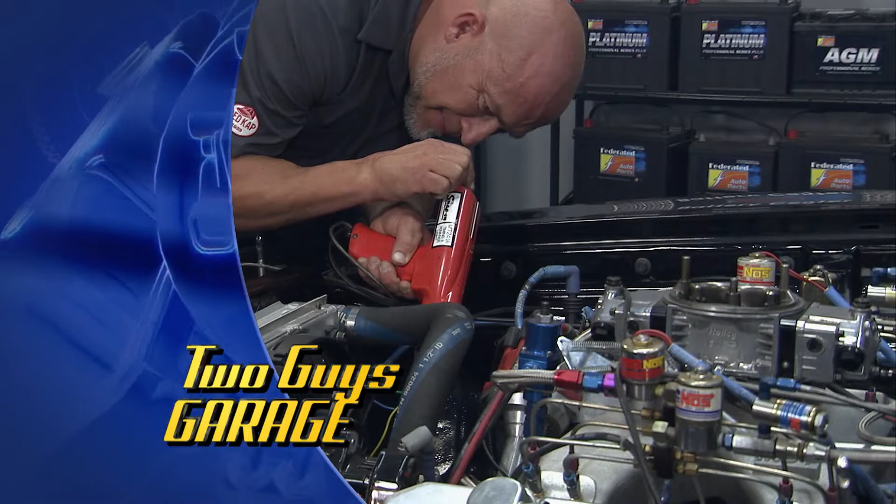So he thinks he's gonna dial this 2007 up to run with my 70 that's in the back. We'll show you in a second. This thing's gonna take off like a herd of turtles beside my car. I know that, and they know that. He doesn't realize that I know that.

Here's how you can benefit. Get this thing where it'll turn. I'm on torsion bars, old school setup, doesn't turn very well. There's your chance. That's my only chance. So we're gonna go left, right, left, right, left, like this. You get this thing working, turning, and I'm gonna go back and dial mine in. I'll see you in a minute, son. All right, I'll be on it. Really?

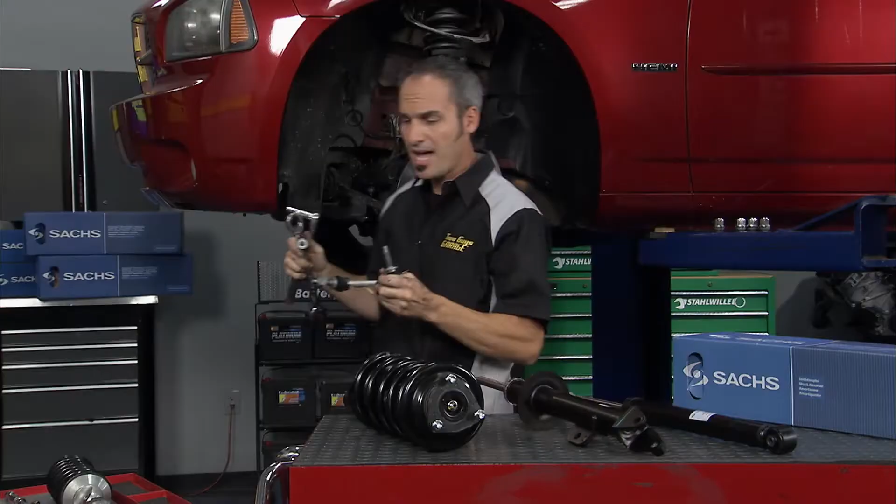If I even have a shot at staying in the same county with Willie once he gets rolling, I've got to dial this thing up. So we're putting shocks and struts on all four corners. Now, you typically want to do at least in pairs. I'm going all the way.

We're starting with precision German engineered shocks and struts from Sachs. These are OE quality pieces, but what we're doing here while we're working is opening up this giant philosophical question: is this a shock, a strut, or a coilover?

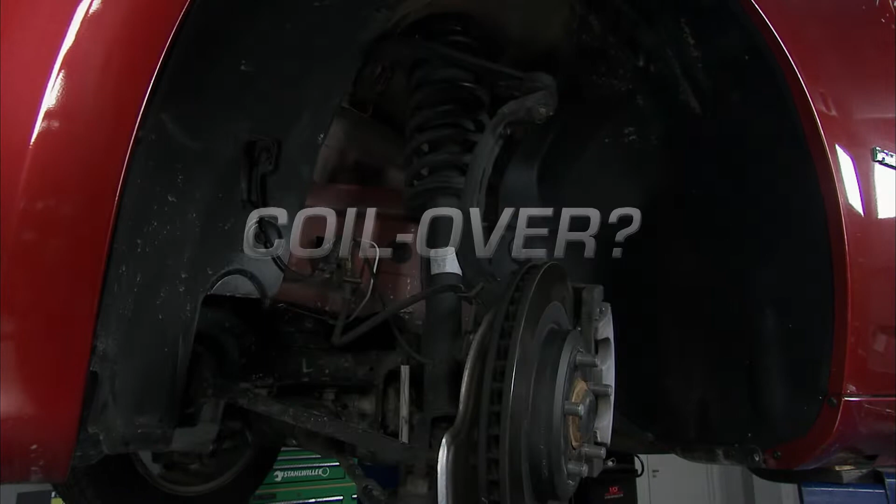Let me explain. If we go back to shocks, it's a real simple device. It just controls velocity or damping, right? It's two forces this way.

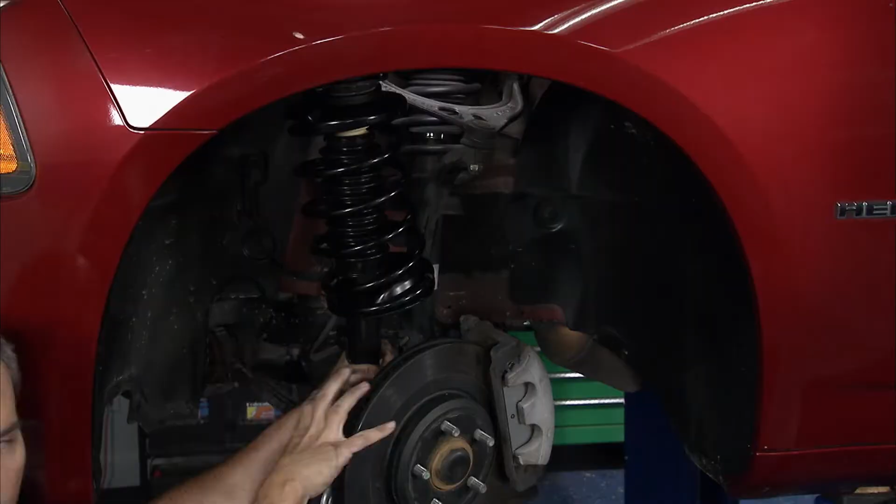Now when you get to a strut, it's actually incorporating part of the suspension. So in the older days of struts, you've got a lower control arm, but you've got your upper knuckle here and hub actually bolting to it. So your ball joint now becomes part of this thing. It's taking different loads, and you don't have an upper control arm on the top. This actually mounts up to your fender area and is taking all the loads that the upper does.

Now it's nice for the OEs because they could save a lot of components, and it works pretty darn good. But if we notice here, this strut now has an upper control arm, ball joint, a full separated knuckle, and a control arm down here. This is just really a shock, but now it has a spring on it, so it looks a little more like a coilover. The only thing it doesn't have is adjustability for ride height, but everything else, it pretty much does.

For all you guys at home, make sure you get a good quality brand. Sachs has pretty much 95% vehicle coverage up through model year 2012 with all kinds of parts, pieces, kits and boots. So let me get rolling. In the meantime...

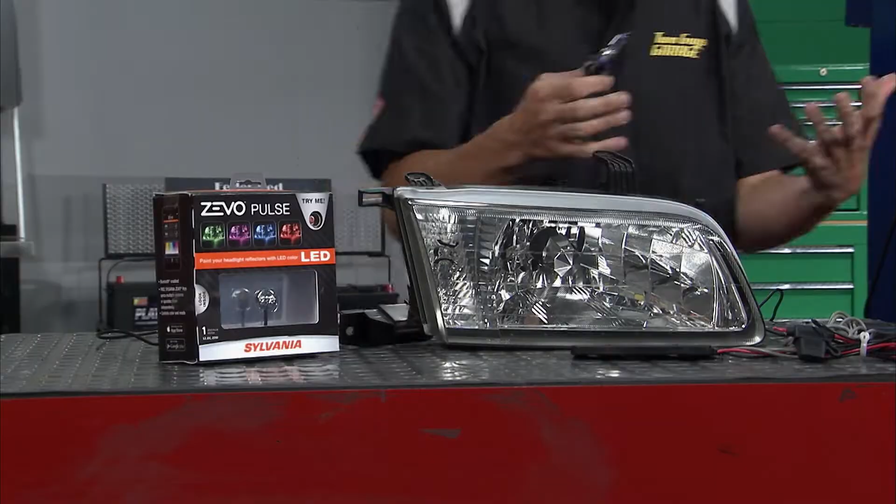Welcome back. Now, while Willie's getting this 70 Charger all juiced up, ready to just smoke me, at least when we get somewhere, and I've been seeing taillights the whole time, I can show up and look cool. I'm gonna show you how we're gonna do that. I'm gonna take the old bulbs out of this baby right here, and I'm gonna replace them with Sylvania Zevo. What that is, it's their brightest, whitest halogen, but it's been modified to make it extra cool.

Check this out. On the back side here, you have a light pipe. So that's basically like, I think, fiber optics, where I can shine right through this with another light, which happens to be right here. This is an array of LEDs sitting right in here. Now, if I connect it to the back side of this, like this, right? Now all of a sudden, when I put it in my headlight assembly like so, I can project whatever I want through there, a whole color pattern of LEDs.

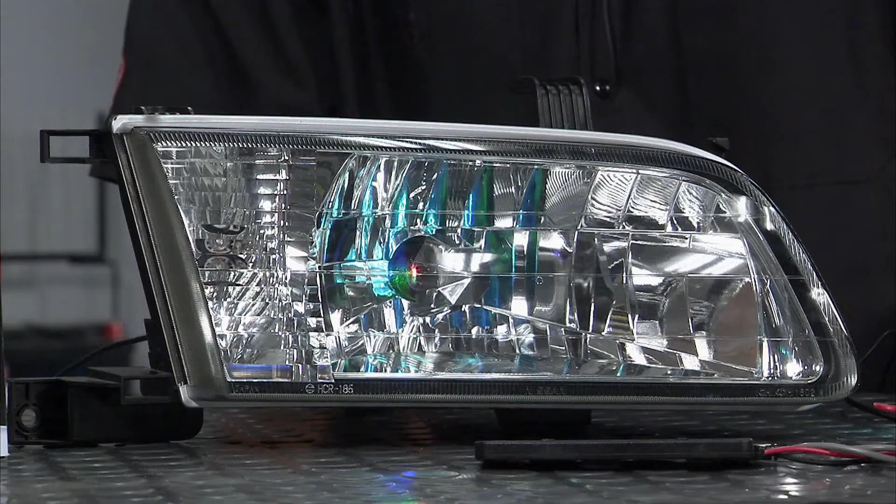I can make them flash, I can do all sorts of things. Let me set it in here and I'll show you. Now, bang, I can crank this thing up a little bit and I can go through all sorts of different colors, brightnesses.

Now, if I go into audio mode, that's even cooler, right? So I can put it on microphone, which is super simple. For my phone, I'm gonna Bluetooth right to this simple controller. So everything that I'm either saying, if I'm yelling out at the crowd, or I got my music playing from the speakers, it's gonna pick it up and match the beat. Or if I wanna go into my playlist and play a song right out of my phone, this thing will read it and jam right with it.

Now let's say you don't have one of their many, most popular sizes, you can use their Pulse system. The Pulse is the exact same thing, it's a little LED engine. You just gotta find a little spot on the front of your headlight. You can put these on fog lights, maybe under your motorcycle tanks so you get a little flashing going on your engine. Pretty cool stuff, man. And it's so easy to put in, 2 little connectors here to your battery, tuck that away, and you're all set. So I'm gonna get this installed because even though I won't be the fastest guy out there, I'll definitely be the coolest.

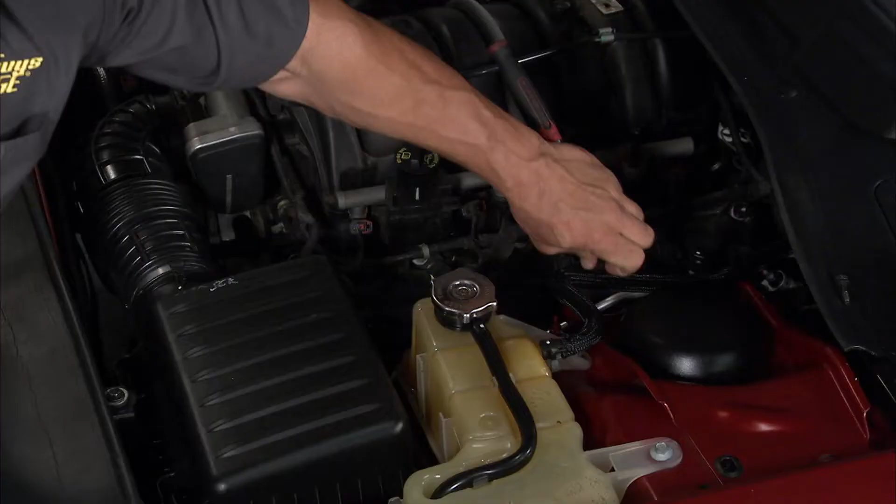All right, I gotta show you something cool. We have some AC Delco professional coil-on-plug boots here I'm gonna get to, but wait till you see when I get this coil out, I'm gonna show you something pretty cool.

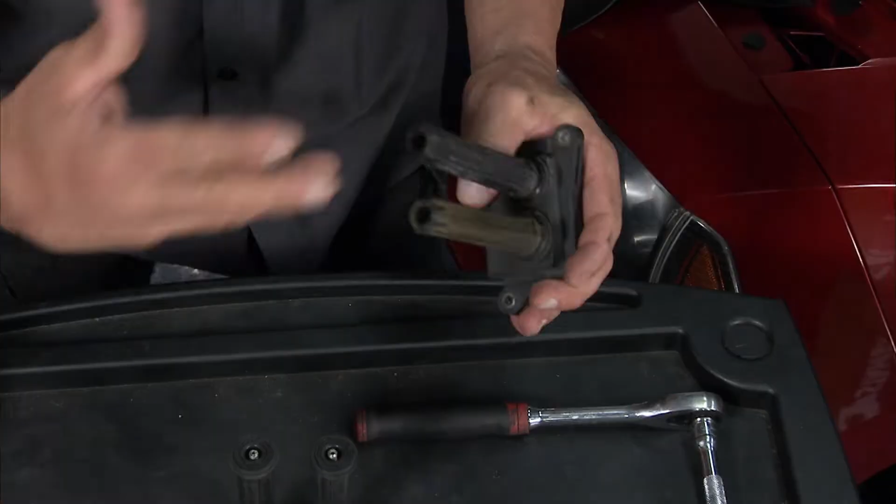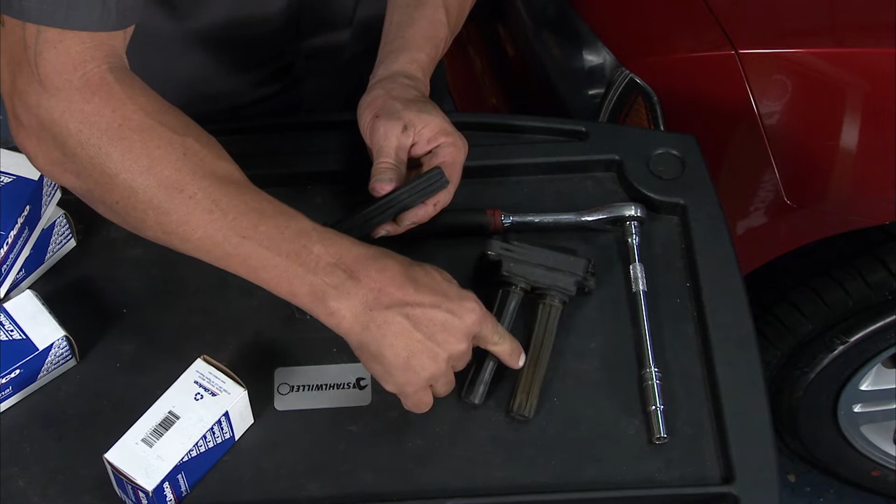Now what you're looking for on any of these is a real snug, tight fit. That way it's gonna keep contaminants, moisture, and so forth away from the plug. That's gonna promote a long plug life. You're looking at something like this high thermal temperature silicone, that's gonna protect against thermal overloading, which you already see on this old plug boot. Get to that in just a second. And check this out, stainless steel wiring, that's gonna ensure it carries all those volts down to the plug where you want that big charge. Now, this is pretty interesting on this Hemi.

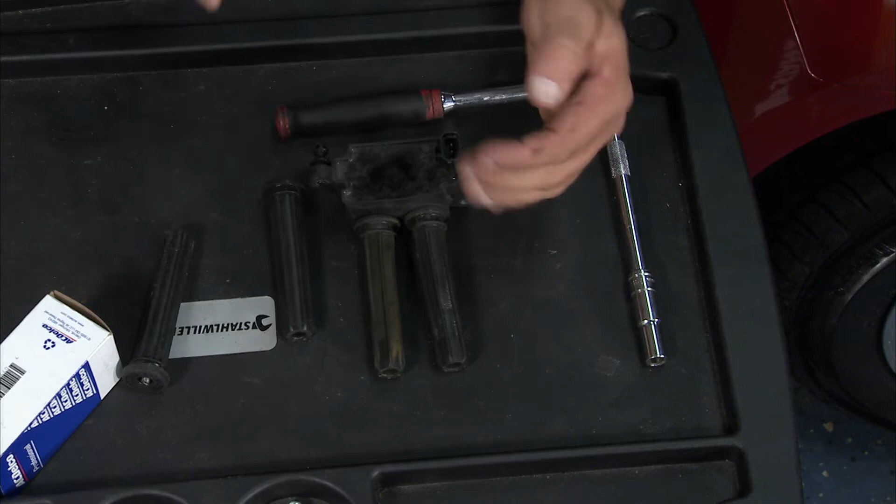Bet you didn't know this. So this guy, I'll show you with a pen, believe it or not, has 2 plugs per cylinder, right? Did you know that they're firing like this at the same time? So what happens, you got this U-shaped rod in here and it's wrapped up with a bunch of wire in this coil. A spark travels down this guy, lights off from that electrode to the ground strap. Then it grounds in the head, travels around, and comes back up through the ground strap to the electrode and back up this guy. So it's firing this way at the same time, like forwards instantaneously and backwards, forwards and backwards. Wrap your head around that, dude. It's like, what?

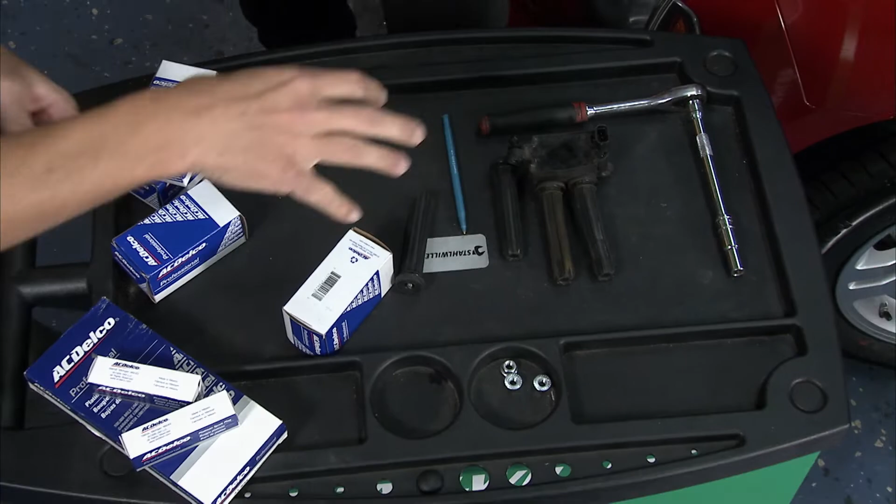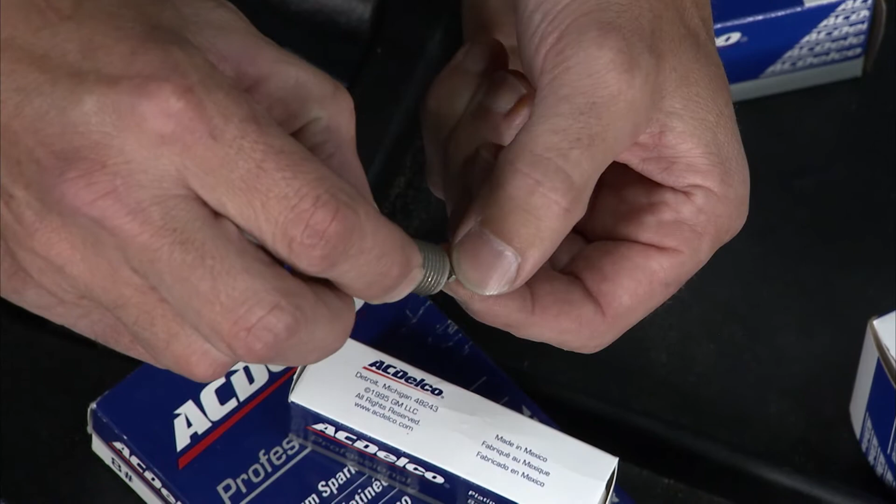Pretty cool. Well, we're gonna get specific with these plugs for this car, right? You want the right plug for your application. We're doing the AC Delco Double Platinum. Now that's gonna have platinum on 2 spots, the center electrode and up underneath that strap. And what that's gonna do is give you that 100,000 mile plus kind of wear, man, and these are gonna give you a 100,000 mile warranty.

Can't beat that. Yeah, if we're gonna wick this thing up in the future, get real performance and dose a lot of heat at it, we can go to their Rapid Fire brand. I'll explain a little bit of that over here.

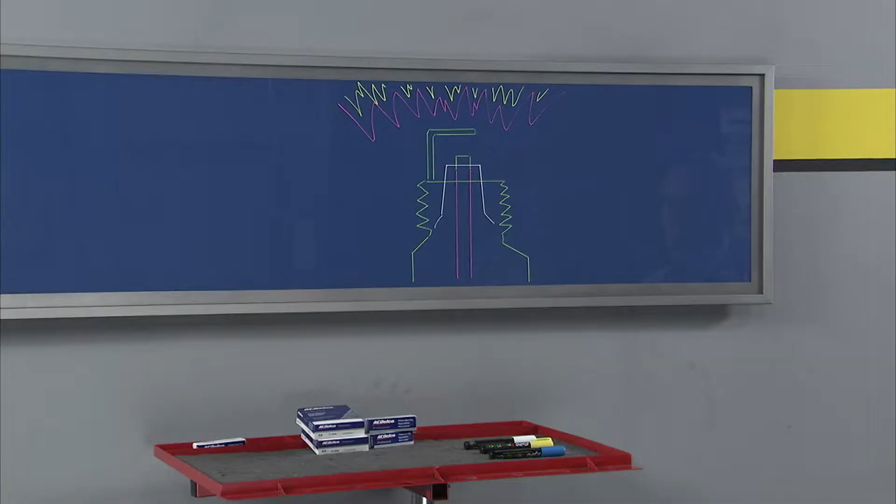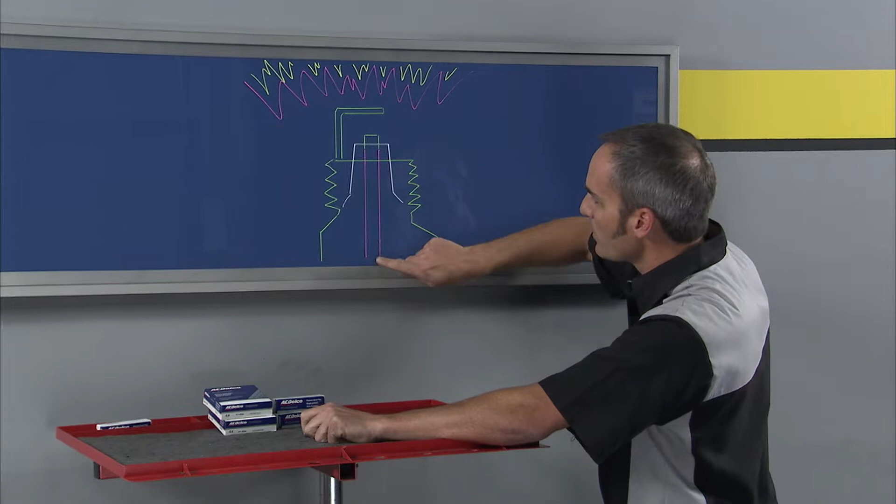Now, spark plugs seem like crazy simple, but there's actually a lot going on in there, and of course they get confusing with all these different fine wires and platinums and whatnots, so I thought I'd give you a little bit of background here. So we know we're going up through our center electrode and we're firing off to our ground strap and grounding out to the engine, right? And so you're firing typically off an edge there, so I might get a little fire off a sharp edge.

Well, that's great, except on a cold start, right? That's actually a cold piece of metal, it's a mass. And so I get a little spark and I start to get a little bit of flame kernel here, and there's enough huffing and puffing going on, I can blow that out. So what companies are doing over time is we've got these little fine points, a little fine wire, right?

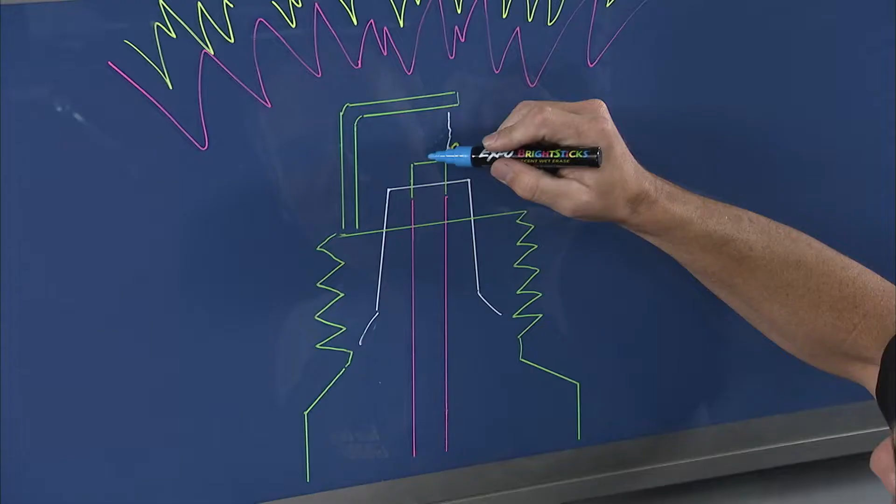You see a little tip on there, and what that does is it keeps a sharp edge, which is great, but now they have to coat it with something because it's so small, it'll erode away faster than this big guy, so then you start hearing things like platinum. Platinum lasts a lot longer than typical materials for the core, so it lasts for 100,000 miles plus.

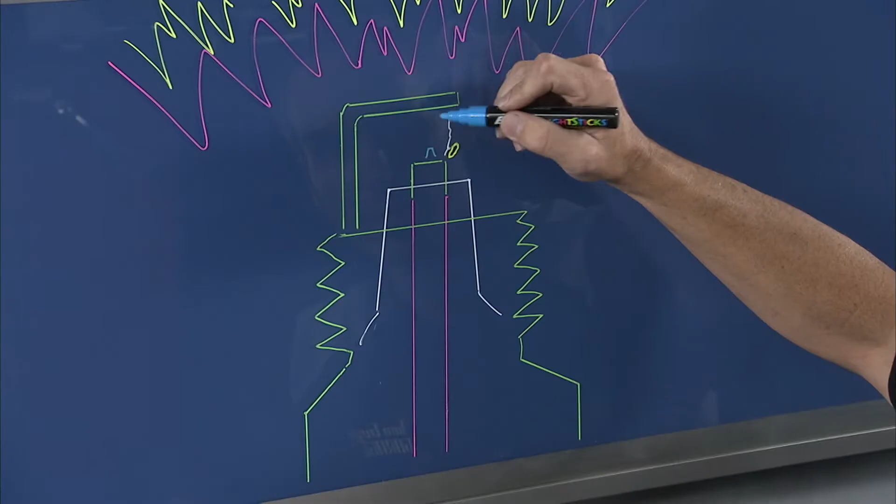Now you remember, we talked about those plugs are firing in both directions. So you notice a lot of these plugs are starting to have a little tip up there, so you can fire either way. You're super happy on cold starts, but you're managing the heat for all your performance driving.

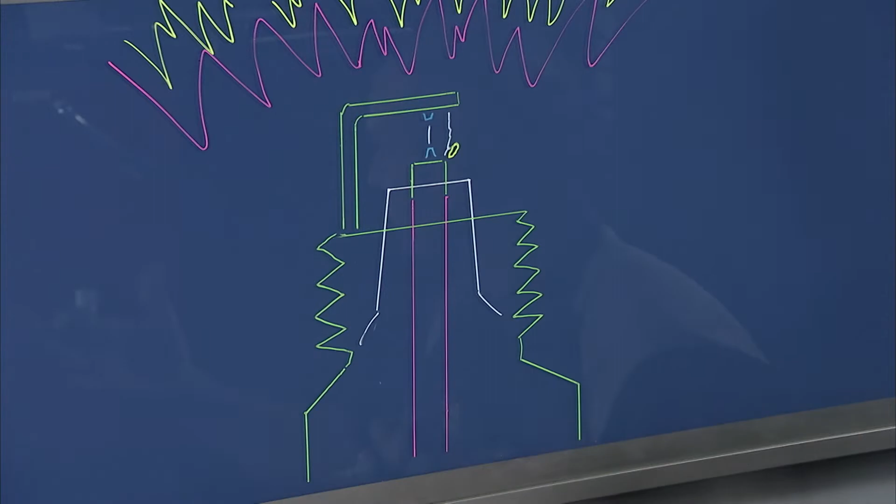Ooh, you are a master of the marker, my man. I did a lot of coloring as a kid. Yeah.

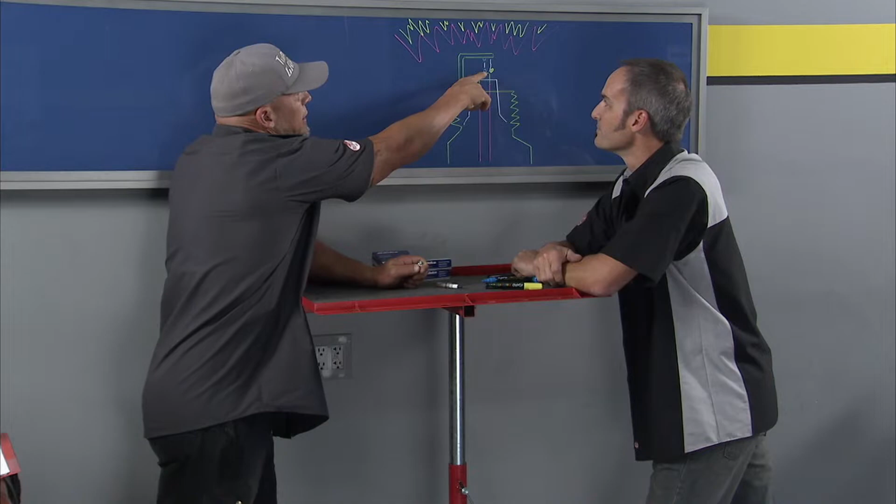One thing you'll notice for the race car applications is they don't have this little piece of metal hanging out there because it just gets too hot. On the rapid fire plugs, you'll see a big hunk of metal sitting down there and a big thick ground strap, not this little guy you have here for our performance-based applications.

Speaking of plugs, did you finish over there or do I gotta go help you out? No, I don't need to change plugs in my car to whoop that. All right, so apparently I'm gonna go finish it up.

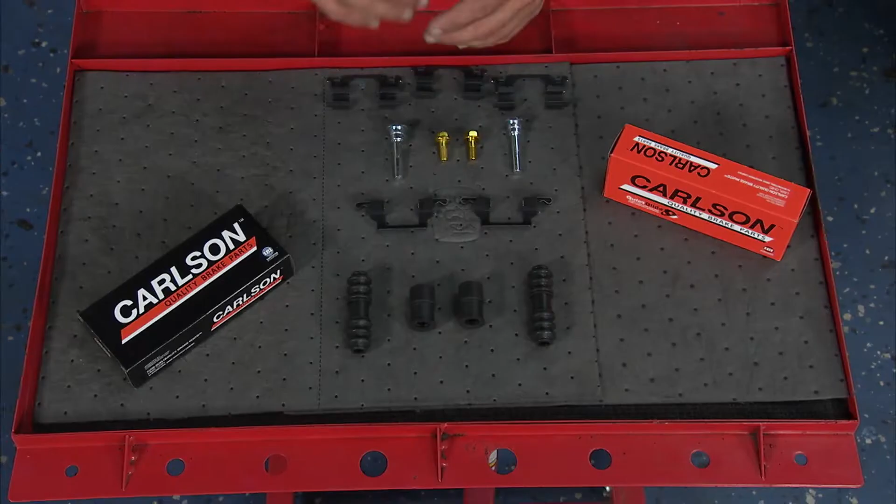Guys, you know it's not a complete brake job without doing your brake hardware. You don't invest time and money in putting new pads and shoes on your car without replacing the hardware too. When you're replacing brake hardware, make sure to use parts made with the highest quality materials possible. Otherwise, you can see early corrosion and extra wear on your pads and rotors.

Carlson Quality Brake Parts recently introduced these Quiet Glide brake pad abutment clips. These are the first aftermarket brake clips of their kind. They're made from a combination of stainless steel construction, PTFE coating, and vulcanized rubber. The stainless steel gives you better durability and resistance to things like corrosion. Carlson uses superior quality stainless steel to ensure a long life for their brake hardware.

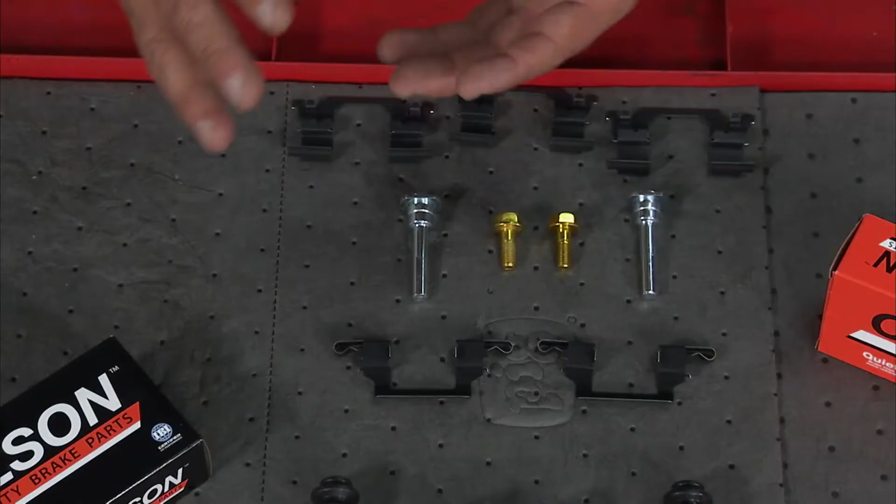They put these clips to a salt and spray test, and even after 230 hours, the clips didn't show any sign of corrosion. That's compared to inferior stainless steel materials where they started rusting 20 hours after that spray and salt test. The vulcanized rubber coating of these clips helps to drastically reduce brake noise.

When you put new brake pads and replace the brake hardware with one of these kits, you can reduce your brake noise up to 70 decibels. That's about as loud as a vacuum cleaner.

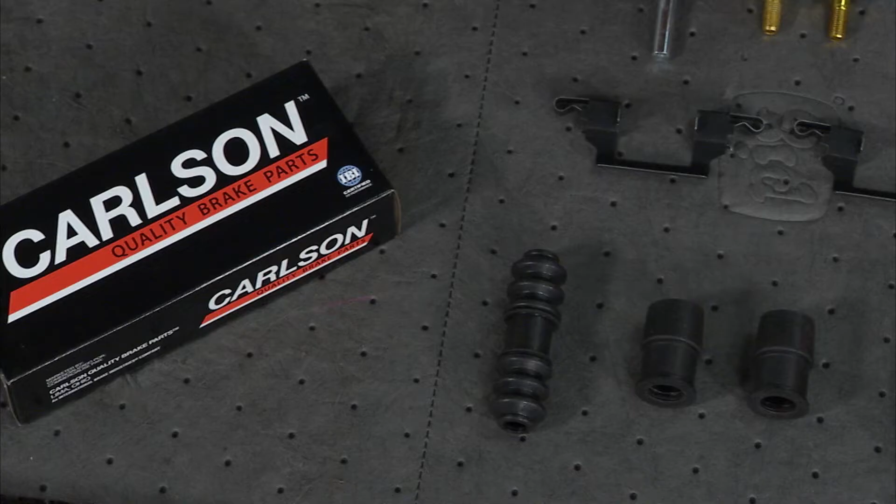The brake contact side of the clip is also coated with PTFE coating, which is an extremely low friction coating that actually self-lubricates, so pretty much nothing sticks to it. This coating reduces drag on your brake components and reduces wear on your pads and rotors. It also makes for a better pedal feel.

Because your braking system is producing less friction, this also reduces heat and you can even improve your fuel efficiency. PTFE also helps repel water, which protects clips against corrosion. Each brake hardware kit package includes an IBI certified seal to ensure the highest quality products for fit and performance time after time. Pick them up at Federated Auto Parts.

Dude, this thing is so cool, man. Yeah, this is the Titan. Now, believe it or not, I paid $300 for this car. It was in the field, it hadn't run in a decade and a half, and it looked nothing like it does right now. It does not look like a $300 car.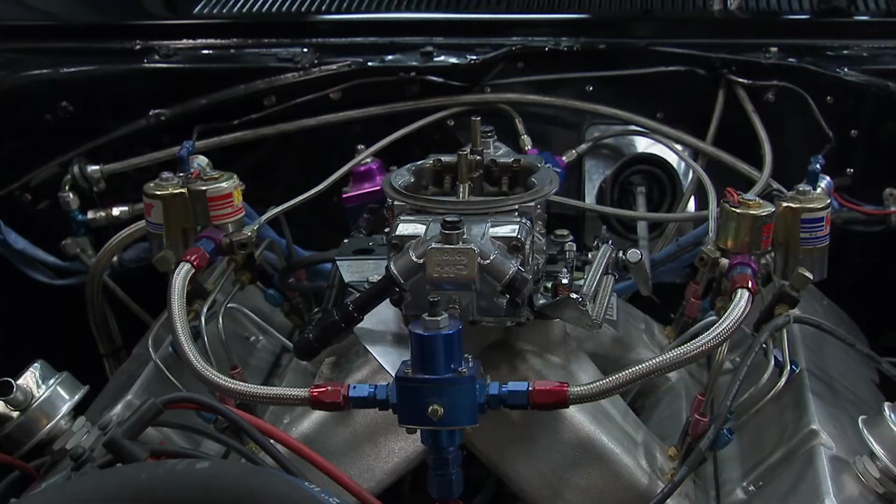Yeah man, so it's a 500 cubic inch big block. Right now it's in street form. When I go to the track, typically I change out the carb, add a little timing, and so forth, but we're gonna get to that in a second.

Then you got this going on, man. Tell me about the fog. Yeah man, I'm a big nitrous guy, so I'll tell you what, this car eats, lives, and breathes nitrous. It loves it. I've thrown as much as 500 to it. It runs mid to low nines at about 152.

Cool. Well, he's got it in street form. He got some timing backed out of it. He runs a lot of pump gas so we can go cruise around, but we're going to the drag strip, so we got to get some octane back in the tank so we can dial this thing back in and go racing. So come play with us on our dyno.

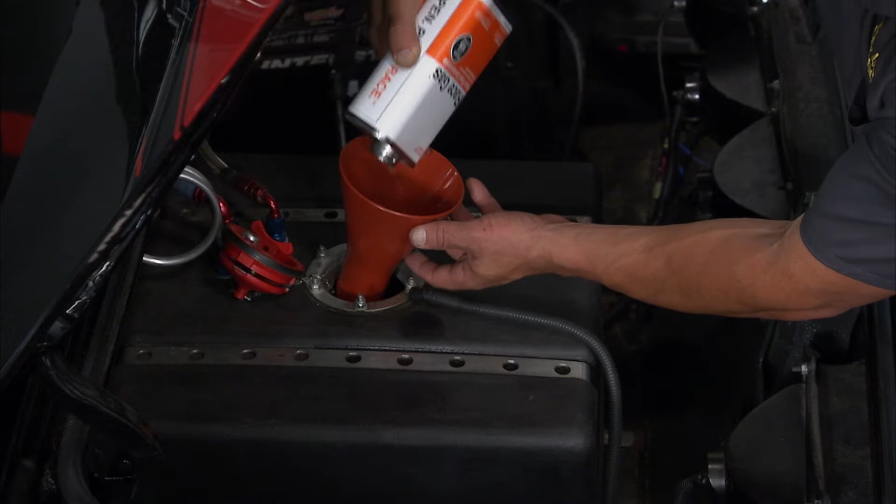Here we go, pouring in the race gas, race fuel concentrate. Woo-hoo, that's what I'm talking about, man. Now I'm ready to go racing. Believe it or not, that makes my fuel 107 octane. I basically made race fuel out of some premium unleaded.

I don't have to worry about traveling all over the place, finding a place to carry race fuel, how am I transporting the stuff, where am I putting it, paying I don't know, $100 for 5 gallons.

What I like about it is it's a direct replacement for standard distilled racing fuels, because this isn't your sort of octane booster. It's distilled racing fuel that brings the octane, but it also brings the BTU, the energy content for the volume you put in your engine. It's a completely unique and different chemistry. It doesn't change your air-fuel ratio, and you can have a couple cans in the trunk.

Now, you ready to cap that thing off so we can do a couple of pulls? We're going to get on this dyno and start doing some runs, put in some spark. We'll see you in a minute because we're going to take a break.

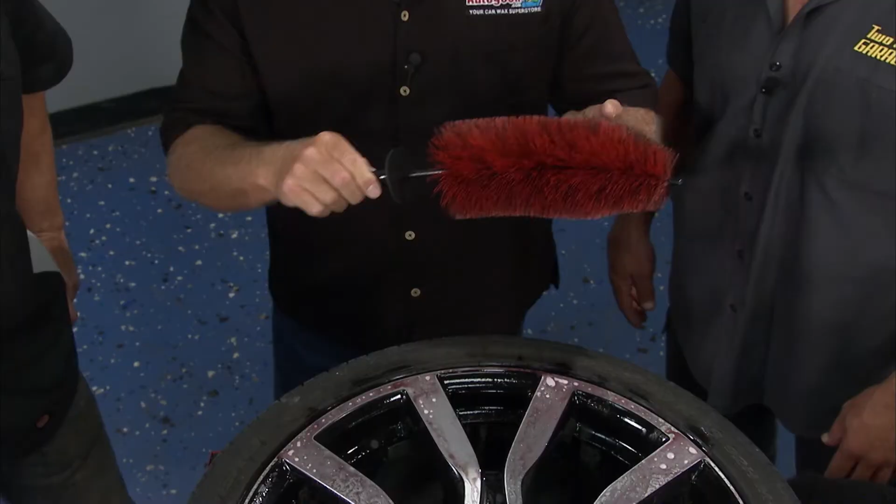How do you get down in there, because I've got tight spokes on mine, so I can't get that in. We've got a tool for that too. This is called the Speedmaster Wheel Brush, good for getting into those intricate areas. The other cool thing is it's flexible, so you can bend it to custom fit your wheels, get in behind the spokes to clean the backside, or leave it straight to get the barrel, to get everything clean.

The next thing you want to do, of course this would be on a car, is rinse it off and get everything off there. Now through the magic of television and a little garden hose, bam! That looks good. That thing looks fantastic. Then, now that the rim's clean, the next thing is to address the tire.

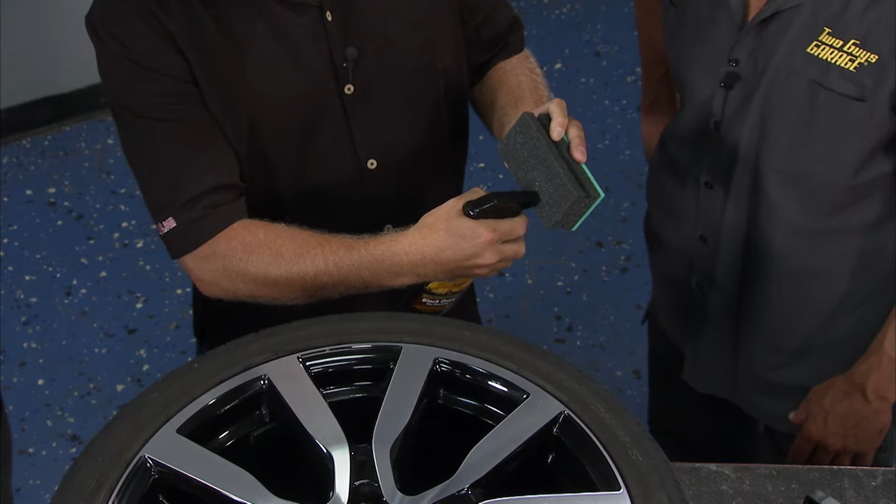This is called a tire swipe, and this is the Pinnacle Black Onyx Tire Dressing. Here's a little technique: instead of spraying it on the tire and getting it all over your rim that you just cleaned, you bury the nozzle into the foam and inject the foam with it, especially on the edge here. That way you can get right down next to the rim, which is the hard part to get to when dressing a tire. This is going to keep the tire from turning brown and give it that deep, dark black look we all love.

It's important to keep tire dressing on your tire to keep it flexible so it doesn't dry rot and crack, besides making it look good. The important thing is to work it in well, and if you have any excess, wipe it off, and it'll keep your tires looking black, just like that.

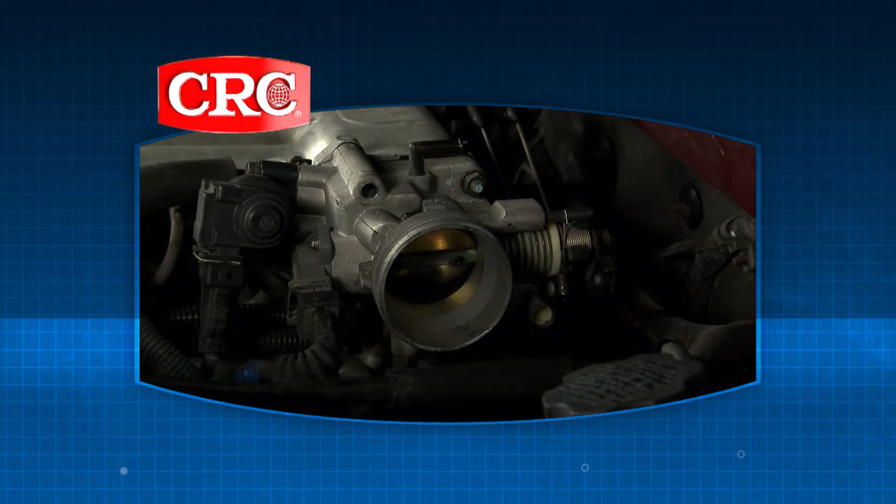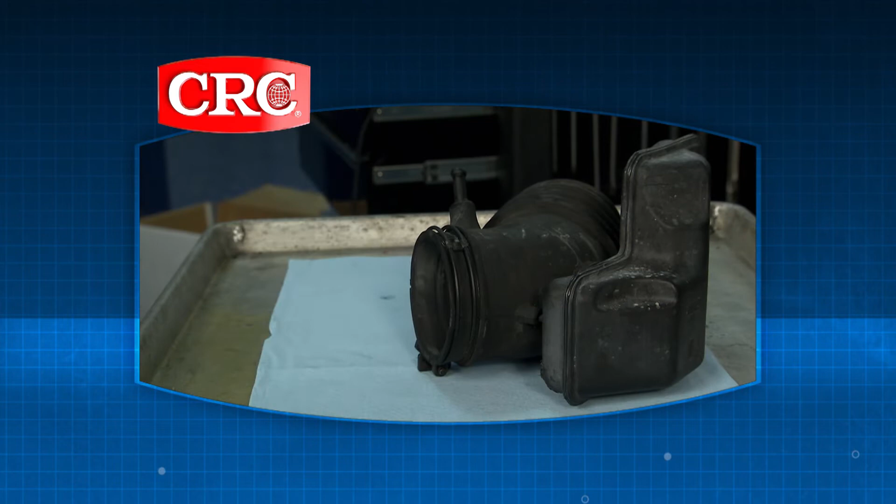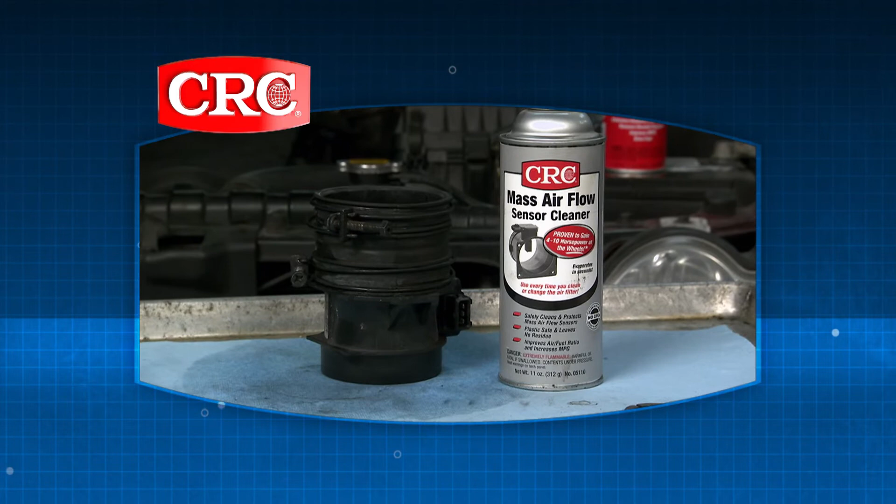If you're noticing rough idle or hesitation, it could be because gum or deposit buildup in your throttle body is blocking airflow into the engine. The throttle body is easy to clean: remove the air intake duct, place a rag under the throttle body to collect runoff, manually open and close the butterfly valve, and spray CRC throttle body and air intake cleaner on the unit with quick bursts. Don't spray continuously. Clean the throttle linkages to get rid of lubricating residue, then spray your air intakes to allow the greatest airflow back into the engine. Since you may have to remove the mass airflow sensor to reach the throttle body, this is a good time to clean your MAF sensor too. Improve your overall miles per gallon by repeating the process every 10,000 miles.

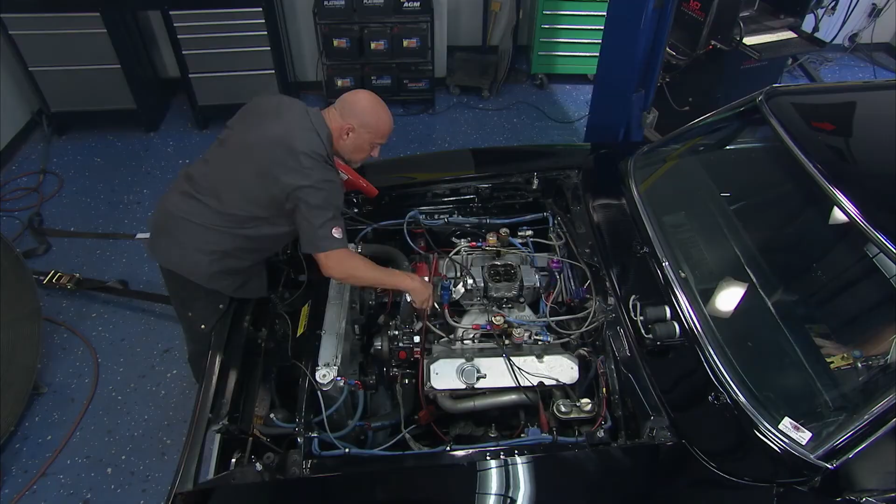First pull, not bad, needed some timing obviously. Grabbed the Stahlwille boxing wrench, able to put 2 degrees in it. Gave me 42 horsepower, from 606 to 648. Pretty happy with that.

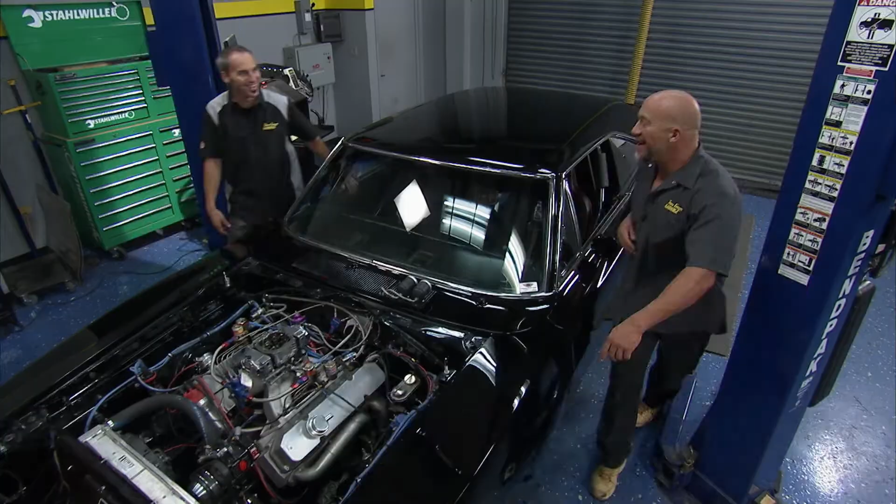That's what's up, not bad for a motor run, man. She's running strong, and I think I lost all my hearing, but I love it. All right, we're out of time, man, but we're going racing. We'll see you at the track. Now we get to spray it.